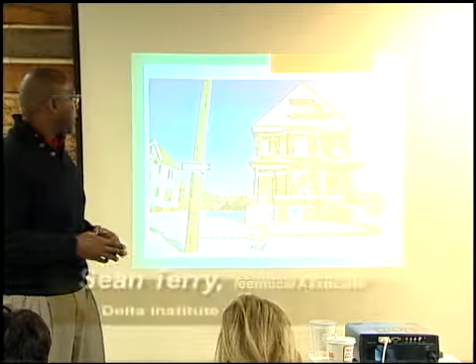I want to point out the embodied energy that's available and the materials that are still remaining: the brick, the lumber, the appliances that may be inside, the windows, the doors. Not only does that embodied energy have reuse value and the opportunity to be reused elsewhere, but it also represents a new market opportunity through recycling, upcycling, and new opportunities in new market areas. So keep that in mind as we move forward.

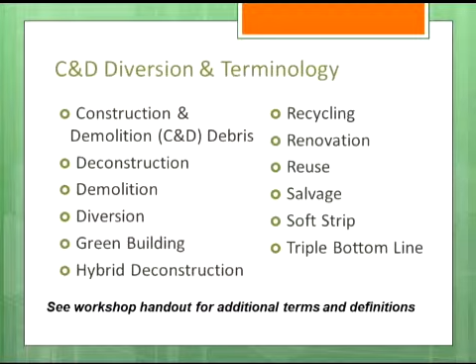I'll point out a couple of terms here, but I want to draw your reference to the worksheets you were handed. A lot of our sustainability conversation includes words and phrases that are sometimes used interchangeably, and sometimes incorrectly. So construction and demolition, C&D debris, deconstruction, demolition, diversion, which includes many different forms of demolition, recycling, etc. These are all terms that are often used interchangeably. Feel free to reference the worksheet if you have questions on a term, or feel free to ask us, and we'll explain it in context.

So I'll start here with an interesting image of a home and trees, and the figures represent 250,000 homes, according to 2009 EPA data, that are demolished each year. And of those homes, 1.5 million trees in the form of the board lumber in those homes is lost.

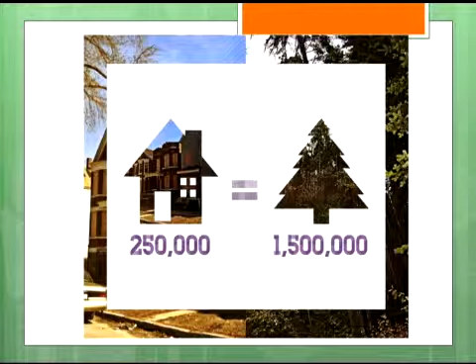Again, when we talk about embodied energy, we're talking about natural resources. It's not exclusive to board lumber, but I point that out because natural resources aren't manufactured. These are natural resources that are here, and when that material is used and a home is demolished, we actually lose the value in it.

This next image is a closer look, and it correlates to the state of our landfills. According to data, around 40% of our landfills are comprised of C&D material. And of that 40%, we see the breakdown here: 28% of that 40% is coming from demolitions, 15% from new construction, and 57% from renovation.

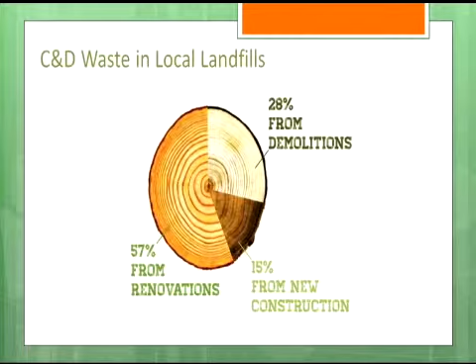So I wanted to show this image to bring to light that we're not specifically looking at demolitions when we talk about landfill conditions. The C&D material that comprises the landfills is not exclusive to demolitions. It's actually inclusive of the entire building loop.

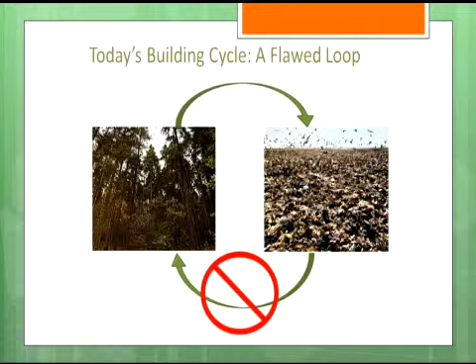The building industry in itself has been inherently flawed for a number of generations. We use natural resources, we build, and the standard practice has been to dispose once we're done. We encourage new materials when we build new, but once material goes into a landfill, its value is lost. We're talking about a system that at this point really should be looking to pivot and redesign itself in a way that, one, takes us a step back, two, is not as reliant on landfills, and three, maximizes other opportunities and new market opportunities as they come up.

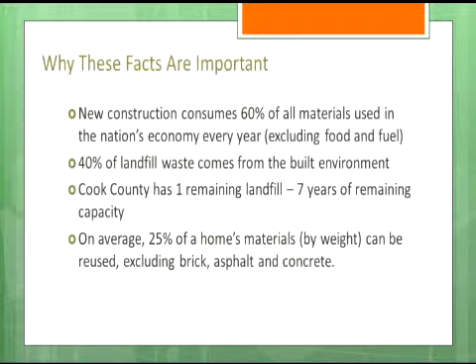And why is this important? Again, 40% of our landfill waste comes from the built environment. Specific to this region in Cook County, we have one remaining landfill and roughly 7 years of remaining capacity. And more importantly, there's an Illinois ban that impacts Cook County and limits our ability to just build another landfill.

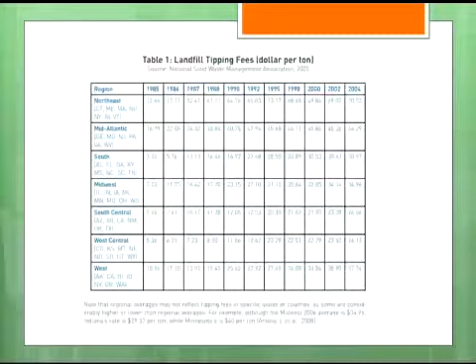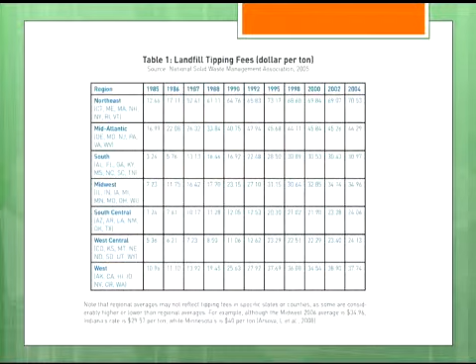So the association with that is a capacity issue, but it also translates to cost - cost in transportation, cost in tipping fees. This slide indicates the trends we've seen since 1985 with landfill tipping fees across the nation. Specific to the Midwest and municipal solid waste, we've seen that trend line continuing to go up. So the correlation here is as landfill capacities go down, costs go up - not only in gas, but in tipping fees, the cost of doing business, the cost of transportation in general, and the cost of disposal are all going up.

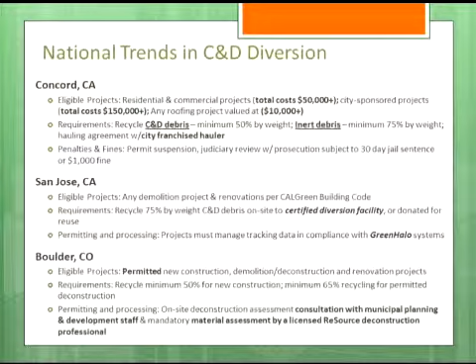Sort of 50 to 75% is the standard that we're seeing. We're seeing that areas are requiring that material being deconstructed and reused or recycled be taken to a certified diversion facility. And then lastly, really holding contractors accountable by incorporating penalties and fines, sometimes a small fine or a scalable fine based on percentage points not achieved, but then also a little bit more stringent in terms of judicial review and possibly jail time.

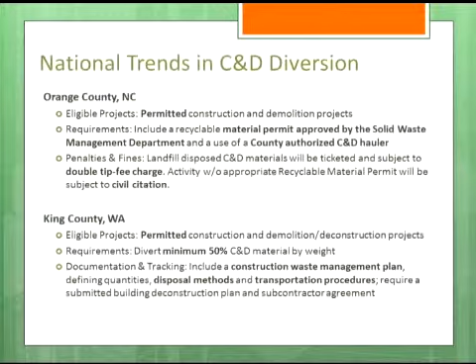At the county level, we're seeing it as well. Orange County, North Carolina, King County, Washington, again proactive, very aggressive areas taking C&D diversion to the next level by incorporating county-wide ordinances that require permitted construction and demolition projects to meet certain milestones. Interesting here, we see the correlation between solid waste management divisions and the encouragement of the use of authorized C&D haulers. At the county level, a little bit more of a broader perspective, incorporating other elements of the industry and the system to make sure that C&D diversion is actually taking place and being managed responsibly.

Locally, we've seen the Village of Northbrook and the City of Chicago especially shine as a local trendsetter or trailblazer in C&D diversion ordinances. Again, eligible projects, both new construction, renovation, as well as demolition, require certain percentage points for recycling, and then the implementation of a fine and penalty system where, in both instances, percentage points below whatever that requirement is incurs a fine.

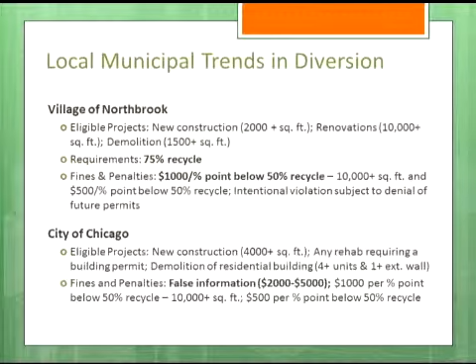In Chicago, it's 50%. In Northbrook, it's 75%, tacking on a $1,000 fine per percentage point not met. So really, again, designed to create accountability within the industry.

It's not just the creation of the ordinance itself, but also incorporating resources that make it easier for contractors to actually meet that. In the City of Chicago, we highlight a green building permit process that is very transparent and straightforward, and it walks contractors through the process of securing a green permit, the types of projects based on their feasibility and benefit tiers, and then incentivizing contractors to actually pursue that.

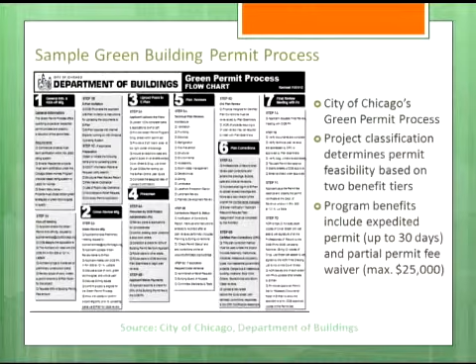So for the City of Chicago, depending on the project, there's an opportunity to realize benefits in the form of a partial fee waiver and/or an expedited permit. So these projects that are incorporating sustainability, inclusive of C&D diversion, are getting faster turnaround and actually saving you money.

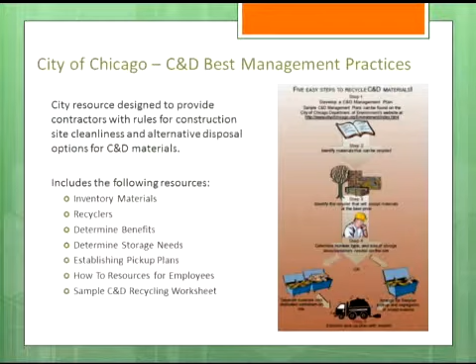In addition to that, the City of Chicago has created a best management practice that also provides resources to contractors around inventory of material, local recyclers that are recommended, and a number of benefits, creating mechanisms for safe and secure storage on site for projects that take multiple days. So again, resources complementing the ordinance to balance it out and make it not only a transparent and straightforward process, but one that provides you assistance when needed.

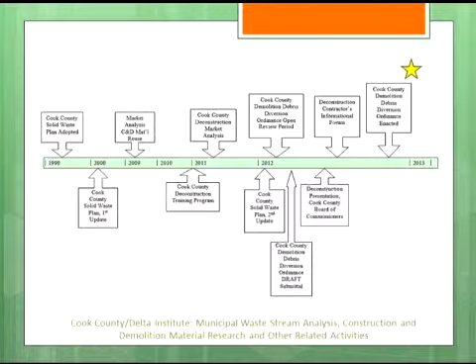Before I turn it over to Brian to talk about the ordinance, I just wanted to give you a snapshot of the activity that Cook County has been pursuing around C&D diversion, starting with the original solid waste plan, which was then updated in 2012. Cook County has empowered the Delta Institute to do supportive research around C&D material and reuse, and I've included some of that information on this timeline to indicate the amount of effort that has gone into designing the ordinance, drafting the ordinance, and encouraging public review before the ordinance actually went public. So to get into the ordinance, I'll now turn it over to Brian.

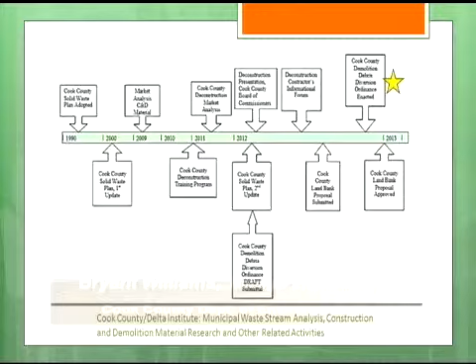One thing that I do want to point out is the amount of time, thought, and research that went into our ordinance. Our initial solid waste plan was adopted in the early to mid '90s, and since then we've updated it and altered it, trying to build upon and improve it. Around 2011, we started a deconstruction training program. We also had market analysis conducted that year on how we can help alter the industry to make it a little bit more sustainable.

Why are we thinking to make it a little bit more sustainable? Because recycling rates statewide have been dropping for a number of different reasons. One of them is because the population has grown quite a bit, specifically in certain parts of Cook County. The state has a mandate of 25% recycling across the board, where they'd like to see all materials recycled at a rate of about 25%.

Particularly in Cook County, we're falling short across the board. That's not just contractors, that's everyone in general. Particularly in the south and western suburbs, we're well below those rates. In the northern suburbs, they're a little bit higher, but they're still beneath those rates as well.

So what we were trying to do is be a little bit more proactive as a county, also taking into consideration that right now there's only one open landfill within Cook County. That's the one out on the Bishop Ford, and depending on who you talk to and what day of the week it is, they may tell you there's upwards of 2 to 5 years of capacity remaining in that particular landfill.

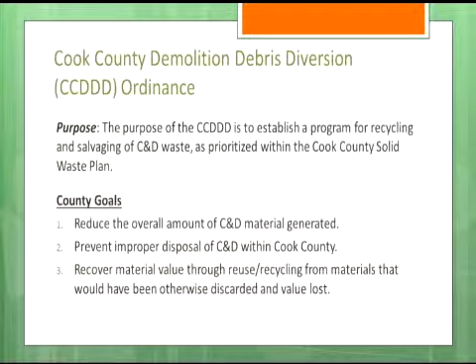So the other goal of this ordinance is to recover materials that have a value so they can be reintroduced into the market overall. There's a lot of materials that go into landfills: bricks, wood, vanities, tubs, things of that nature, that could actually have a value, that do have a value in the market.

I get calls all the time in my office with people saying, 'Oh, it's just an old house from the 1920s and 1930s.' A lot of those fixtures and those materials are fashionable again. My home was built in the 1920s, and I love it. There's a lot of old fixtures that I wouldn't have been able to get if I had purchased a home built in the 1990s. So a lot of those materials do have a strong value.

The way the ordinance works is it has three components I really want to focus on before I delve into it. Obtaining a permit is essentially the same. You still have all of the same paperwork that you have to submit, and you still have to provide the same environmental reports. The fees have changed slightly, and all that information has been disseminated to you and is on our website. Please Google Cook County Department of Environmental Control.

It'll pop right up there. But the requirements are a little bit different. So the most important aspect of the ordinance to me is the diversion requirement. The diversion requirement for residential structures is 70% diversion of materials from a landfill.

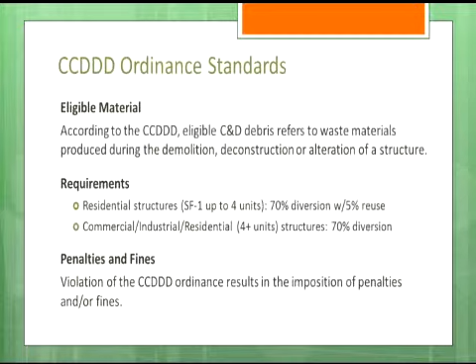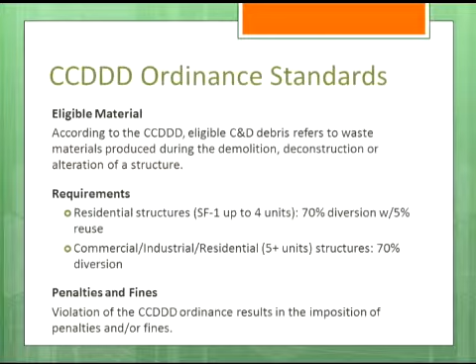One thing I want to specify is that residential structures are considered structures of 4 units or less. If it's 5 units or more, it then becomes a commercial structure. So our commercial structures are 5 units or more, apartment complexes of 5 units or more, or commercial facilities, warehouses, and industrial facilities. And that's only subject to the 70% recycling requirement.

Now you can reuse those materials as well. Bricks obviously can be reused. Some of the materials from office spaces can be reused as well. But all we're requiring is 70% recycling on those structures.

There are penalties and fines if you don't report your information properly, or if you don't report it at all. But there are also ways to communicate with us—for instance, if there's a fire-damaged facility and you can't meet that requirement, just document it and submit a waiver request, and you would not necessarily have to meet the requirements.

Ultimately, the goal here is for you to work with us, communicate what your situation is, what your project is, and we'll work with you to try to help you reach your goals. So the second aspect of the ordinance is the waste recycling plan.

The plan has to be submitted up front—that's maybe the only alteration at this point to the submittal package. So we wanted to try to make it as easy for you as possible. I know some of us aren't as tech savvy as others, but we've been trying to encourage everyone to use this tool called the Green Halo system. It's a tool that's completely free to the contractors and free to the municipalities to use.

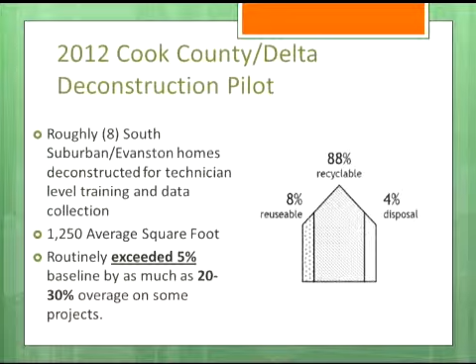So there really weren't any metals available in those homes, but we still, during the market analysis, were able to exceed the 70% recycling goal by about 18%. We also found that there were 8% reusable materials in those homes, so only 4% of the debris generated during those projects was actually disposed of. That's not to say that's what you have to do, we'd love to see it, but the requirement is 70%, and it's eminently doable if you put a little thought into your project.

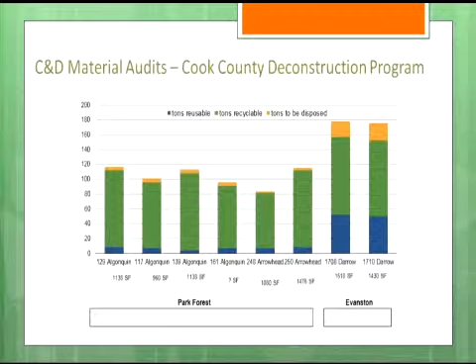In closing out, I want to reiterate that the Green Halo system is a tool we're really trying to push, as part of our overall goal to become a zero waste county. All the paperwork, faxes, and paperwork in triplicate being sent back and forth, the postage and envelopes it's packed in — we can try to move away from that.

When you make a copy of these manifests and they're 200 sheets, how much does it cost to send that package over to the office? I've received packages with 200 or 300 sheets of paper, an entire ream that costs about $15. And then how much time and materials are you spending to copy and collate that information? If we can use the Green Halo system and send that information electronically, it'll be a lot faster for you and for us, so I can get back to reviewing and processing your permits more efficiently.